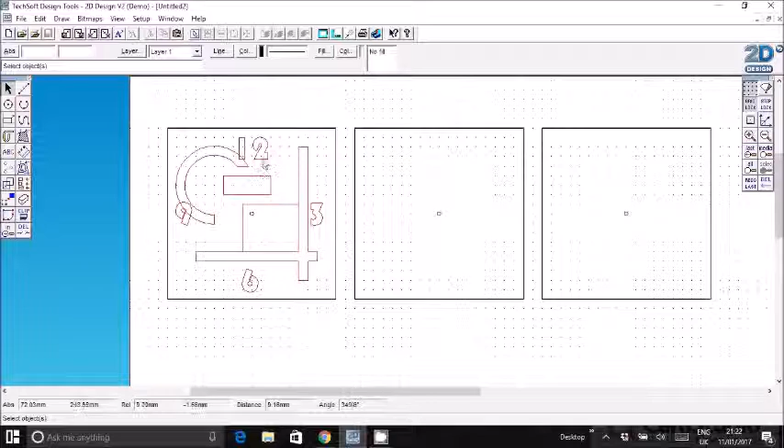If I click on each number, press the shift tool, then you can click multiple things. I've got the shift button held down.

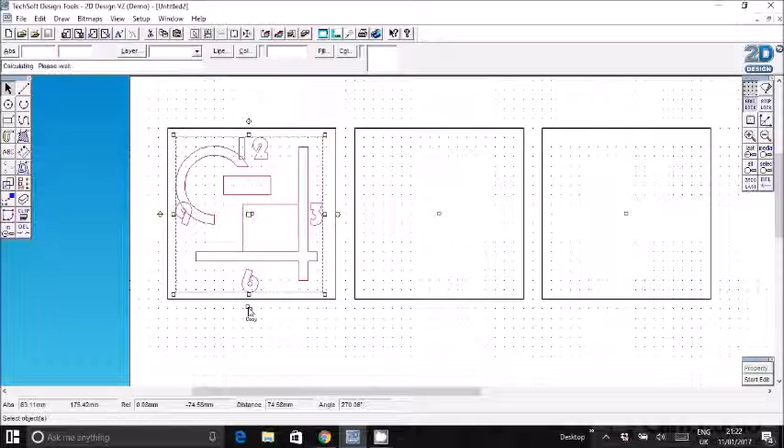Okay, so I've selected all of them, and I'm just going to click this copy icon here. See these two yellow boxes? If I click copy, then I'm going to move all of these numbers into position. That'll be about right, yeah.

And if I click and change the properties and then settings, I can actually choose a different font. Now remember, Art Nouveau was popular in the early 1900s, so I need to click a font that was kind of popular back then. Something like this one would be popular in that time.

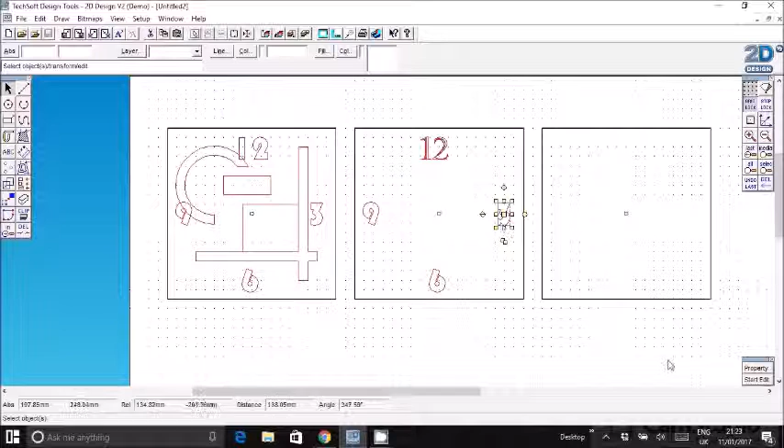Okay, yeah, I'm quite happy with that, so I'm going to change the font to all of these numbers similar. Which one was it? I'll begin with C. It was that one, Castellar. Okay, right, you do that to the other numbers so that it's a more Art Nouveau looking clock. I'll be back in a second.

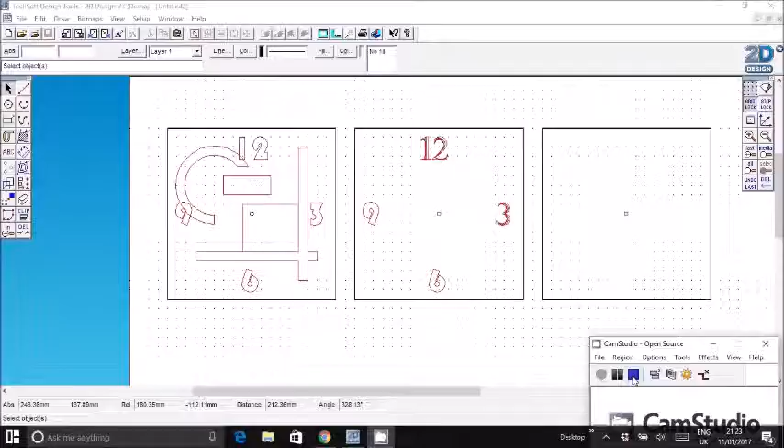Okay, once you've got your numbers as you want, we need to add some kind of organic shapes. Remember, Art Nouveau is all about natural looking things: plants, human shapes, curves.

One way you can do that is find images off the internet. So what I've done is I've just done a Google search for floral shape. Floral means like a flower, and I quite like this one here, so I want that on my clock face.

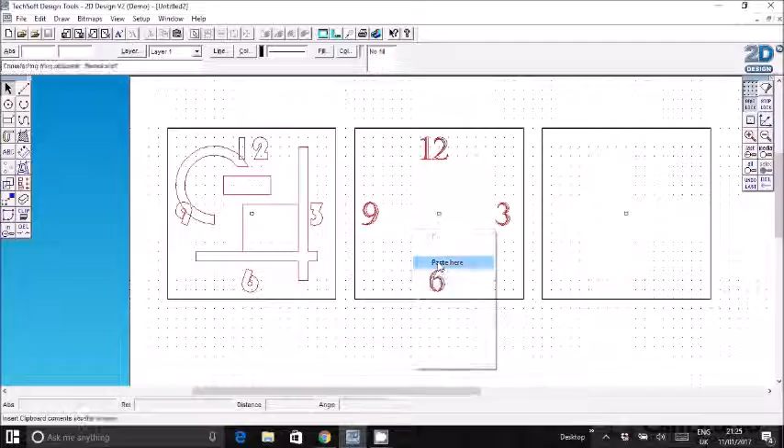What you do is you right click on it and click copy image. Then if you go back on 2D design, you right click again and click paste here. Now you've got the image cut in.

Now look, if I just grab the yellow corner and drag it in, it might get all out of proportion. Look, oh, I don't want that. So you click edit, undo.

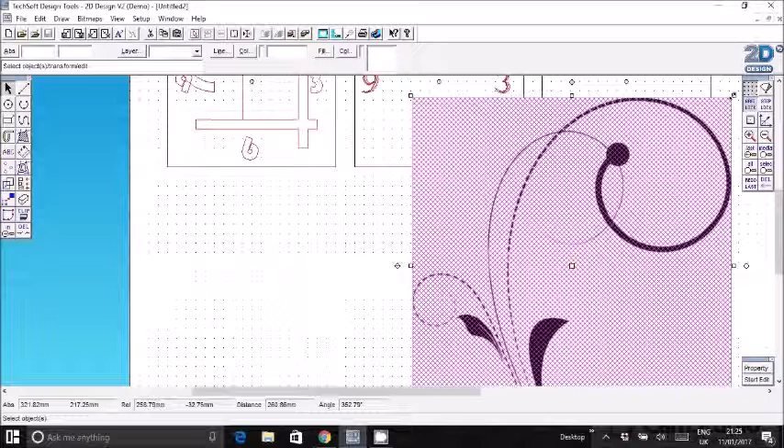One way to avoid that, let's say I want this smaller, if you just click a corner point but hold the shift key at the same time, that way it's going to keep its proportions. Okay, I'm just going to move this up. It needs to be a bit smaller, so again I'm going to hold the shift key and reduce the size to what I want. Oop, I've just jumped up.

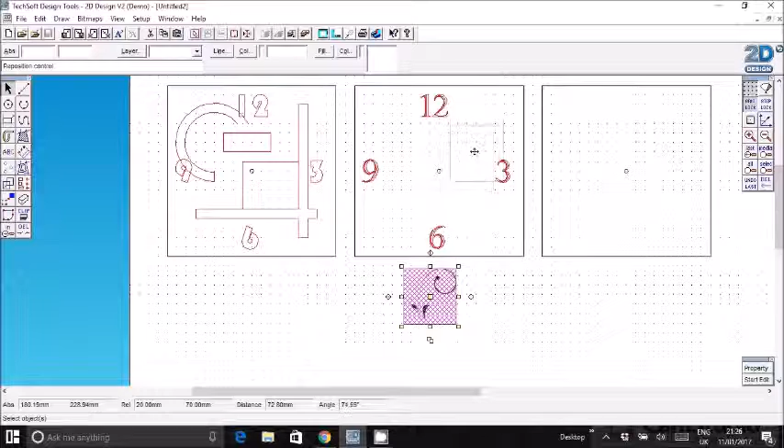Okay, and I want this in the top right corner, so I'm just going to put it up here. There. Okay, it's not quite a nice organic image, that, but that's just a picture, and the laser cutter can't cut pictures, so I need to change that to a series of lines.

The way you can do that is you click bitmap, then vectorize bitmap, and you get this little hand come up, and you need to click on the image. Then you click monochrome, and if you change this setting, the luminance, it can get bolder or lighter, and I probably want this a bit bolder so it's really clear.

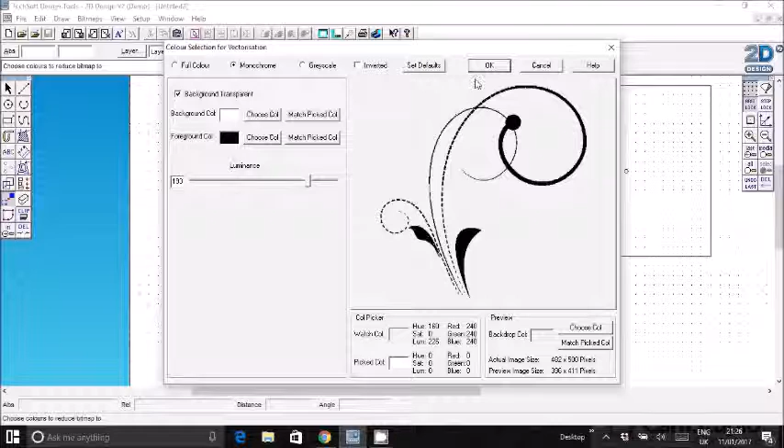And then I'm going to click OK. Now that process turns that picture into a series of lines. And of course, if I click on it, remember, the fill needs to be no fill, and the line color here needs to be red.

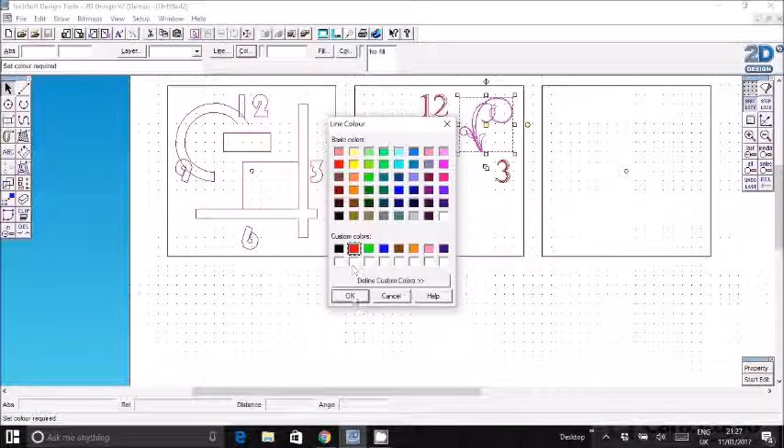Okay, now that's a nice curvy shape, but I've only got it in one corner and I want it all around my clock. So there's a way you can do that: if you click on the object and rotate it. So if you go draw, transform, rotate, and I'm going to repeat it 3 times.

Now it's going to go 3 times around the clock face. That needs to be a 90-degree rotation. Okay, angle of rotation 90, repeat 3 times.

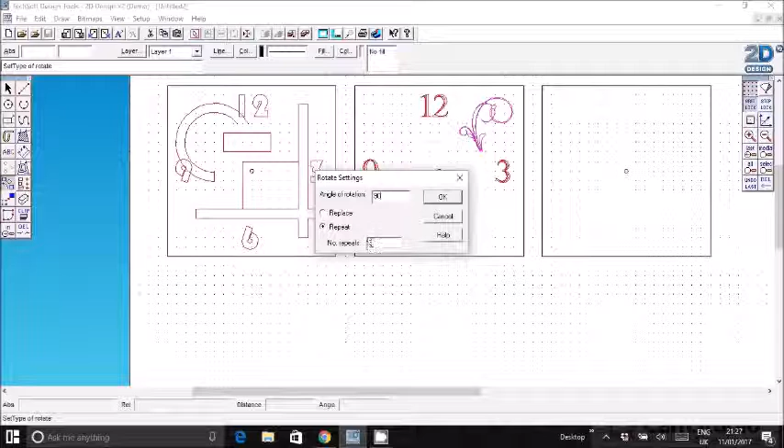If I then click OK, and I click at the very center of my clock face, watch what happens. Boom. Click select, there you go. I've got quite a nice organic type image to go on my clock. I like that.

I'm going to click save. Okay, so click save and we'll move on.